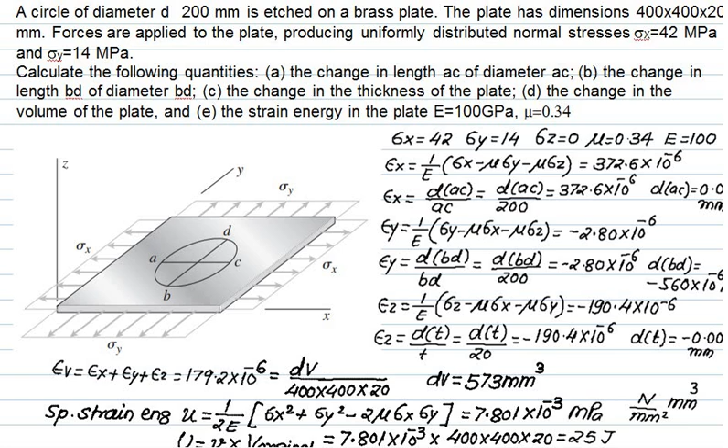Reactions you can find out by using sigma Fx equals to 0, sigma Fy equals to 0, and summation of moment is always equals to 0.

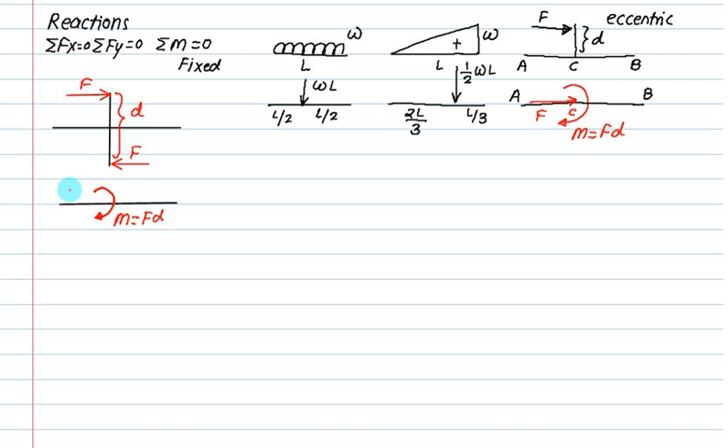Your idea is to convert UDL, eccentric load or triangular load or couple load into equivalent point load and equivalent couple. Aur uske baad phir aap reaction nikaloge aur phir SFD ke liye start karoge. Yahan tak ok.

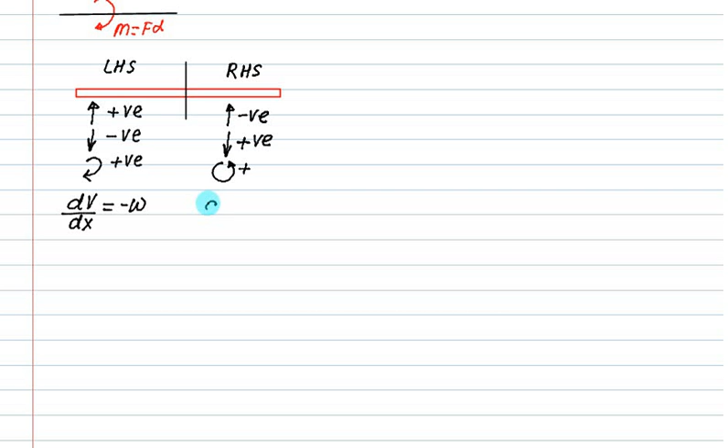उसके बाद हमने ये भी पढ़ा है कि जो हमारा शेयर फोर्स होता है, dV/dx इज इक्वल्स टू -W. करेक्ट। इसका मतलब है कि हम dV को -W इंटू dx लिख सकते हैं। W मतलब तुम्हारा लोड।

अगर हम इसको फिर से जैसे कि इसको XY कोऑर्डिनेट में डाल देते हैं, और ये आपका x है और ये आपका dV है, अगर हम इसको इंटीग्रेट करते हैं dV, तो विल यू गेट इंटीग्रल ऑफ -W टाइम dx।

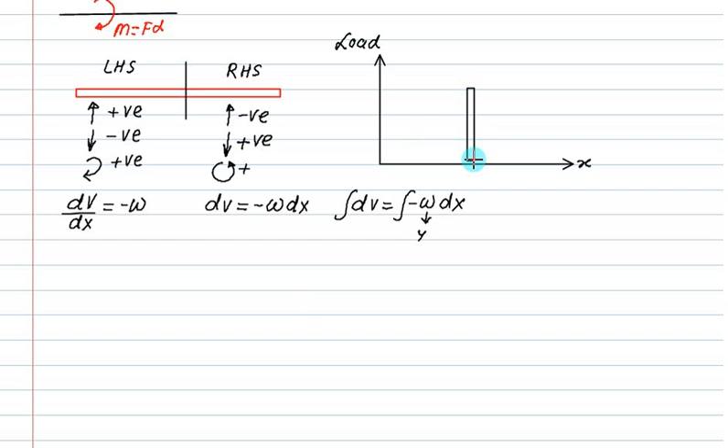करेक्ट। तो इसको हम बोलेंगे y और इसको हम बोल रहे हैं x। मतलब अगर हम यहाँ पर लोड ले रहे हैं, लोड डायग्राम है तुम्हारी, जो आपको डायग्राम देंगे दैट इज कॉल्ड एज लोड डायग्राम। तो क्या ये इंडिकेट कर रहा है dx मतलब एक स्ट्रिप है, इज इट करेक्ट। और क्या W मतलब उसकी हाइट है, तो ये dx है और W इसकी हाइट है। इसका मतलब ये एरिया ऑफ रेक्टेंगल है।

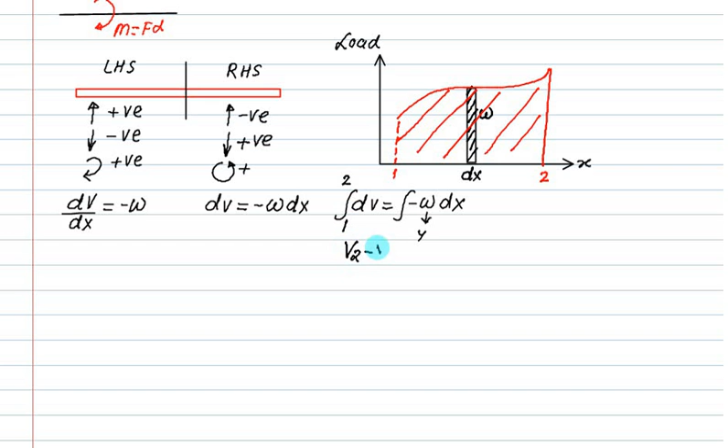अगर आपका लोड चेंज हो रहा है किसी एक पॉइंट से दूसरे पॉइंट की तरफ, ये जनरलाइज कर रहे हैं, तो क्या अगर हम 1 to 2 निकालते हैं तो क्या ये टोटल एरिया मतलब इंटीग्रल W dx हो गया। तो अगर हम इसका इंटीग्रेट करते हैं 1 से 2, तो क्या ये बनेगा V2 माइनस V1। शेयर फोर्स को V से डिनोट करते हैं। सो दिस इक्वल्स टू एरिया अंडर लोड डायग्राम।

That is called as delta V. Remember, it's a change, not absolute value. It will always calculate change.

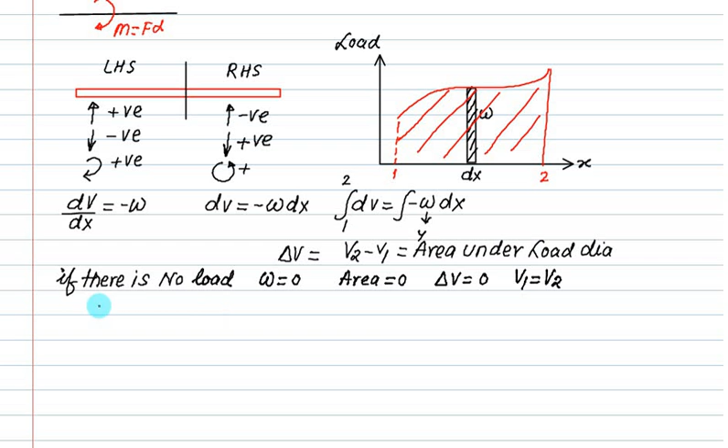If there is no load, then W will be equals to 0. And therefore area will be equals to 0, and if area equal to 0, delta V will be equal to 0. So it means that V1 is equal to V2. So what does it mean? Will the SFD will change or will not change? SFD remains constant.

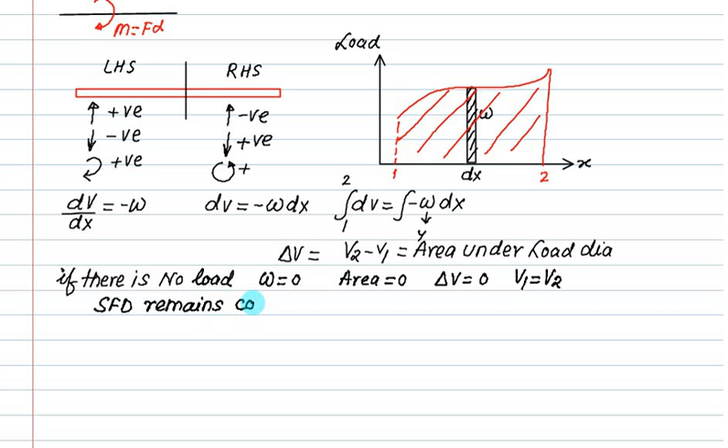For that section, dm by dx is Vx. What is Vx? The shear force at that section. Dm is called as change in bending moment, and dx will be the change in that particular distance. So what is dm? Dm equals to Vx multiplied by dx.

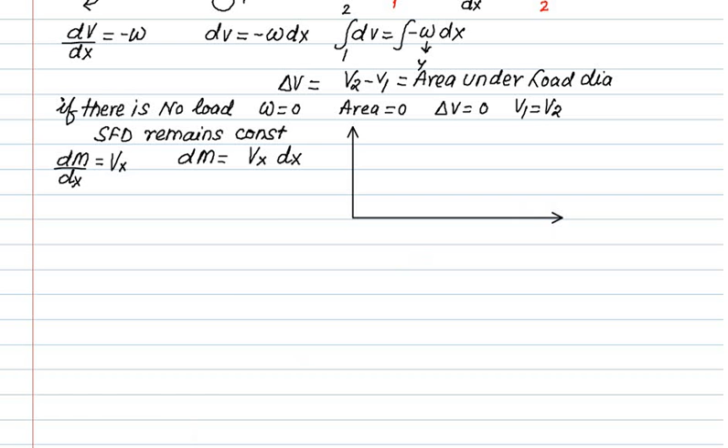इसका फिर से एक मतलब हो गया कि क्या हम इसको ऐसा लिख सकते हैं फिर से, अगर इफ यू कॉन्सेंट्रेट ओनली ऑन द राइट हैंड साइड, इज दिस ग्राफ इज V ग्राफ एंड इज दिस वन इज dx, सो कैन वी कंक्लूड द राइट हैंड साइड इज नथिंग बट अ रेक्टेंगल ऑफ थिकनेस इक्वल्स टू dx एंड हाइट इक्वल्स टू V.

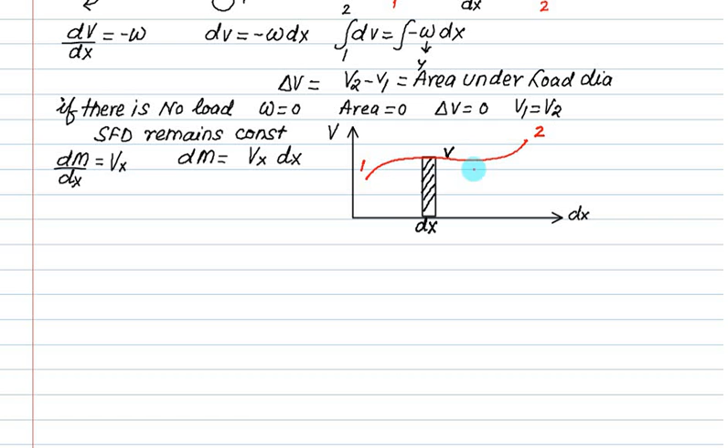नाउ इफ the shear force will change like this from 1 to 2. So is the area under this graph can be obtained by integrating the equation dm from integral vx dx, 1 to 2. So is it equals to m2 minus m1?

Again remember, it's a change in bending moment, not absolute value. Is same as area under which diagram? Is it SFD diagram? Is SFD.

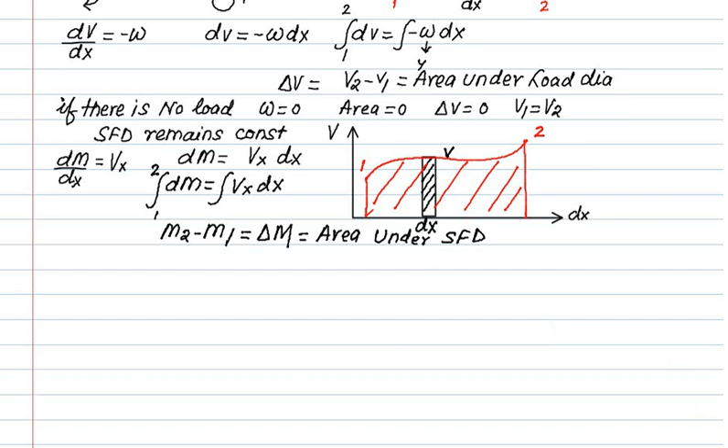The another rule that we have developed is, suppose we have given here one beam, and in this beam there is no load change.

अगर लोड चेंज नहीं होता है तो तुम्हारा एसएफडी चेंज नहीं होगा. इज इट करेक्ट? अगर एसएफडी चेंज नहीं हुआ तो तुम्हारे बीएमडी में कोई फर्क नहीं पड़ेगा. लेकिन अगर यहां पर रेक्टेंगल बनता है, एसएफडी में अगर रेक्टेंगल है तो बीएमडी में क्या बनेगा? 1 डिग्री हरदम बढ़ते रहेगी. सो आपको ट्रायंगल मिलेगा. इज दैट करेक्ट?

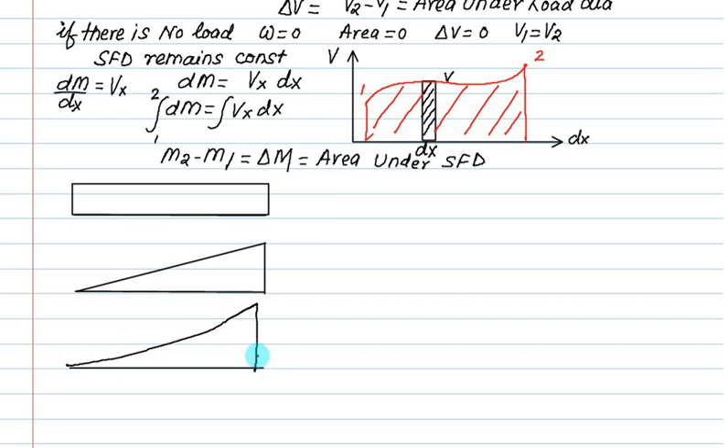ट्रायंगल है तो फिर तुम्हारा बीएमडी क्या बनेगा? पैराबोला बनेगा. इसका क्या मतलब है? अगर हम लोड से एसएफडी की तरफ जा रहे हैं और लोड का डिग्री n है तो एसएफडी का डिग्री कितना रहेगा? 1 से बढ़ जाएगा. और एसएफडी से हम बीएमडी की तरफ जा रहे हैं तो फिर हमारा डिग्री 1 से और बढ़ जाएगा.

कि बढ़ रहा है. सो डिग्री विल इंक्रीज बाय अनदर 1. मतलब ये कितना हो जाएगा? n+2 हो जाएगा. व्हाट इज डिग्री फॉर दिस? 0. व्हाट इज डिग्री फॉर दिस? 1. एंड व्हाट इज डिग्री फॉर दिस? इज 2. व्हाट इज डिग्री? इज y x to the power n.

This equation represents y is equals to 0 or y is equals to constant, that is why degree is n equals to 0. This line equation represents y is equal to x or sometimes multiplied by x, मतलब slope change हो सकता है. This is y is equal to x square or k times of x square.

और अगर SFD तुम्हारा डिग्री 2 में है तो फिर तुम्हारा BMD कितने बनेगा? 3 में बनेगा. और उसी प्रकार जो स्लोप की वैल्यू है वो पॉजिटिव है तो पॉजिटिव रहेगा. अगर रेक्टेंगल ऊपर है तो उसको पॉजिटिव लेना है, नीचे है तो माइनस. अकॉर्डिंग टू दैट यू हैव टू चेंज द स्लोप.

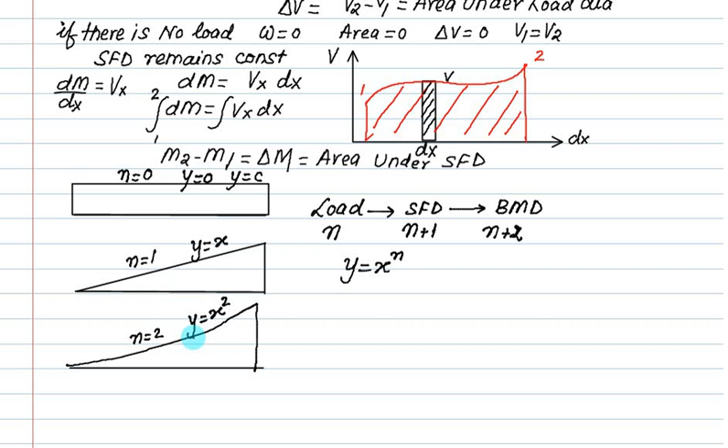द डिस्कशन दैट वी अप्लाइड फॉर लेफ्ट हैंड सेक्शन इज एप्लीकेबल टू द राइट हैंड सेक्शन ऑल्सो.

So one is point load 24 kilonewton, one reaction at point A and one reaction at point B.

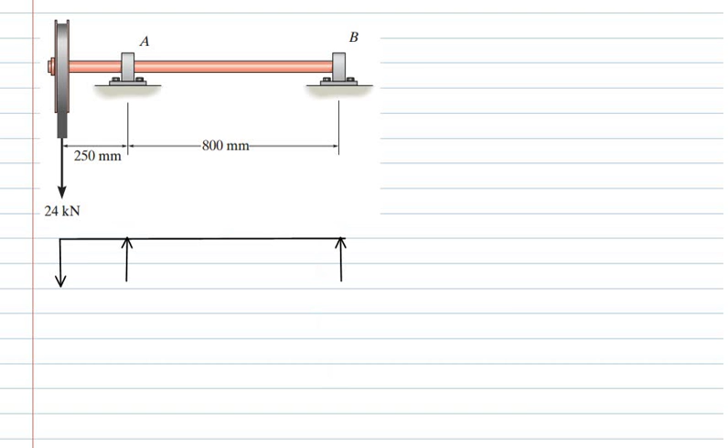If we apply the moment about B, the total moment must equal zero. So 24 kilonewton will make anti-clockwise moment, that is 24 multiplied by total distance, 1050.

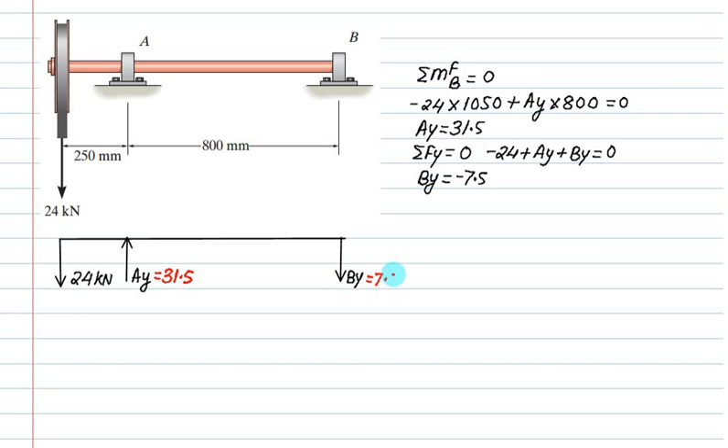Then there is a 31.5, so 31.5. This one is minus 24.

This total is 31.5, so this is 7.5. In between this point to this point, there is no load, so this value remains constant, and finally we close here at 7.5.

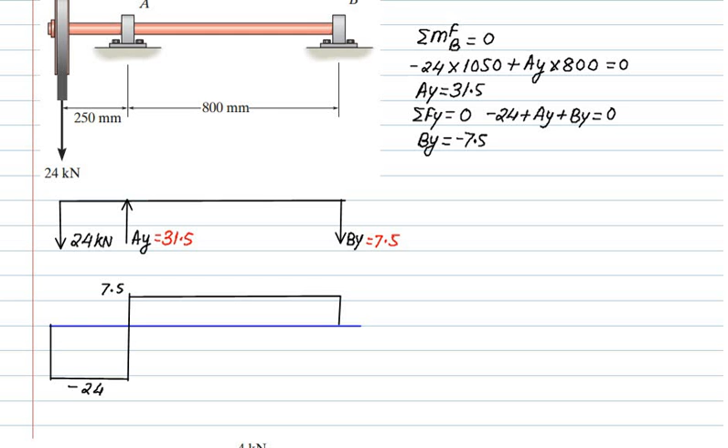You start and end at 0. As far as simply supported beam is concerned, and as far as the overhang beam is concerned, the bending moment at end is always equal to 0. And in the case of cantilever, the bending moment is 0 at free end but is available at fixed end.

So you have to first calculate this area. Area of this figure, a rectangle, is minus 0.25 multiplied by 24, so that is 6. Is this area downward?

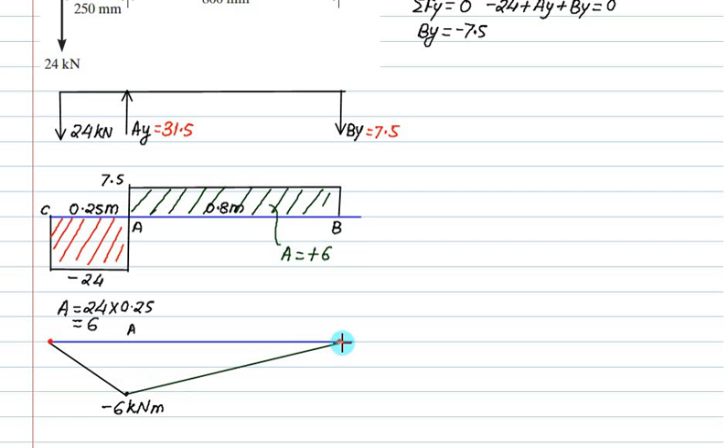If it is rectangle, then it's a triangle. Is it correct? And if this is positive then its slope will also be positive. If this is below then its slope will be negative.

So what is the maximum bending moment for us? This value is called maximum bending moment.

Now after this, the problem is transferred to the bending stress, or from this figure it can be transferred to shear stress.

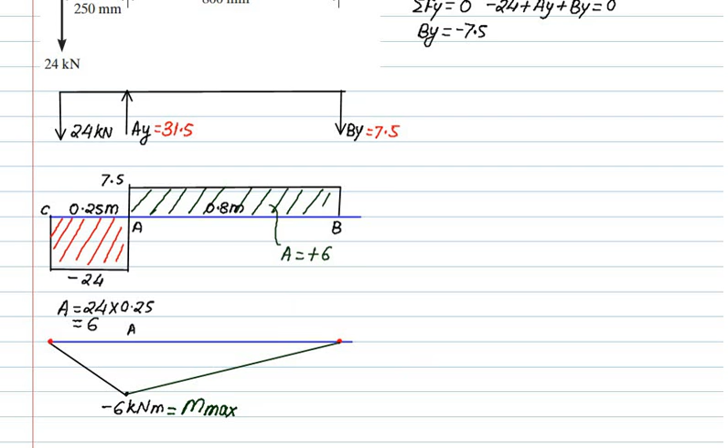So this one is the case of a simply supported beam, and we have two types of load. One is moment is given, one is 4 kilonewton force is given. All distances are given. At B we have roller support, and at point A we have pin support.

So we have two reactions at A and one reaction at B. All of you can calculate its reactions, work that out.

Now to find out the By, you take moment about A.

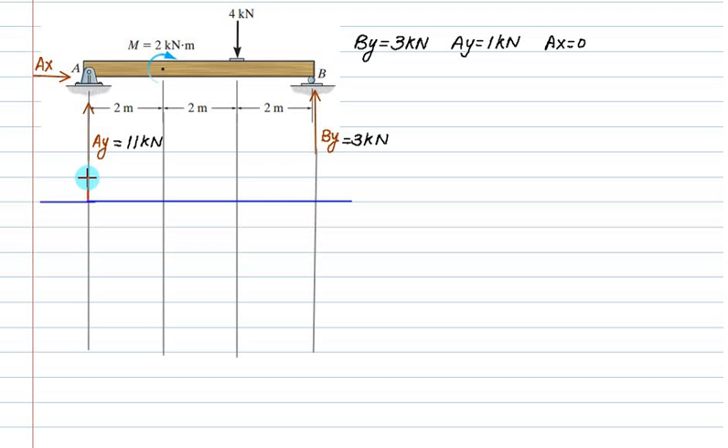1 kilonewton. So we'll go up 1 kilonewton, then remain constant. Moment, there is no role of moment in SFD. Forget about moment, so it will remain constant from this point to this point also. Agree? Moment has no role on SFD.

Then it's a 4, so it will move downward. We already have 1. Now this is 4 downward, it should be equal to minus 3.

And there is no load from the next 2 points, so it remains constant, and finally we close at 0. So this is the SFD.

Now as we all know, the BMD for simply supported at end is always 0. So this is 0, at the end it is always 0.

Now what is this bending moment? What is the size of the rectangle? Is it 2 meter by 1? Is it positive? That means this bending moment will go up to here. No, up to here. Is it correct? We have to take the full area for the bending moment, we'll take the upward force. The bending moment is above here, so we'll take only this much area. So what is this area? 1 into 2, is it 2?

What is the area of this rectangle? 2. Why have we plotted on the upward side? Because our rectangle is on which side? Upward. That means the slope will be positive, we'll check.

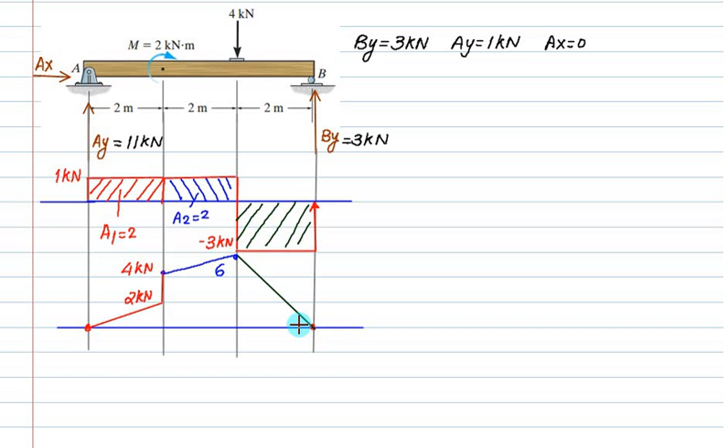Cantilever with a UDL over the entire span plus 1 bending moment. Is it clockwise? Clockwise, no? Okay, 6.

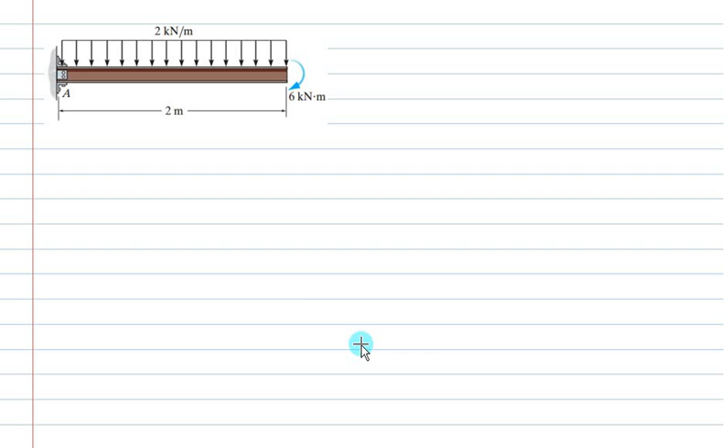So for a fixed end we have 3 reactions. If it is fixed then there will be 3 reactions, one AX, AY and one is bending moment at A. For a cantilever, do not use the bending moment at end point is 0. Total sum is always 0. That is true. So first of all, what is AY?

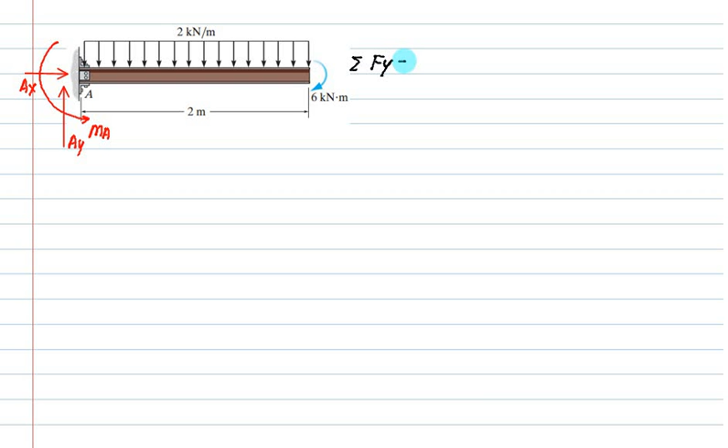So we can calculate AY just by summing Fy. Correct? So sigma Fy equals 0. So here Ay is equal to 4. Agree? Then sigma Fx is 0, so Ax is 0. Remember, total sum is 0. I have not written moment about A.

Now this moment about A, have I taken it clockwise or anti-clockwise? No section yet, nothing about the section right now. Is this anti-clockwise? So this is minus MA. This one is clockwise, so this is plus 6. What is the total load of this one?

Is it 2 into 2, and will it act at distance 1 from this, and this total value must equal 0. So what is the value of MA? This total is 10. So the assumed direction is correct. So now we start with the section idea.

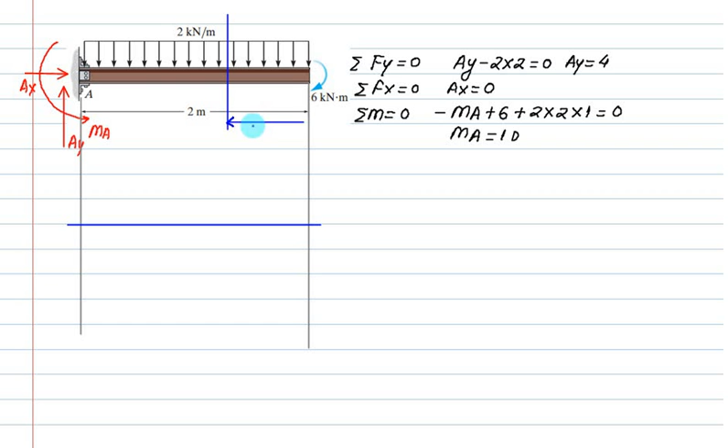So let's say this distance equals x, and let's say this any section MN. So which side are we taking? Right hand side. For the right hand side, downward is positive, correct, and counterclockwise is positive. These are exactly the opposite notation of the left hand side.

Left hand side. Is the force downward, with a value equal to 2 multiplied by x, and is this value positive? And if you put this value, suppose this point is B, so at B your value of x is 0. So what is the shear force at point B? It also equals 0.

At point A, what is the value of x? Is it 2? So this is 2 into 2, that equals 4. Agree? 4, right? So that equals 4. Because you are putting x equal to what? 2.

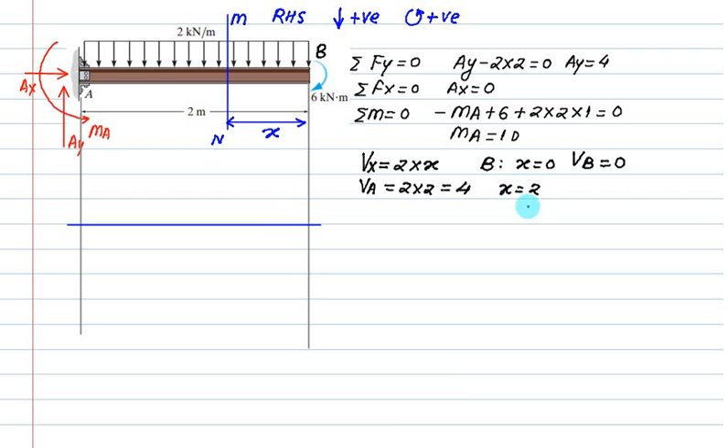What is the bending moment at point B? What is the shear force at point B? 0. What is the shear force at point A? 4. As far as this section is considered, is this 4 on the left hand side? As far as this section is considered, is AY on the left hand side, will it be positive or negative? Negative. So you have to start and you have to end again at the same point.

What is the degree of this curve? Is it 2? Degree is 2 or 1? 1. To observe the free end, is it 6 kilonewton meter? And is it applied at one section only? Is this clockwise? So anti-clockwise is positive, so clockwise will be negative for the right hand side section.

So what will we do, we'll move downward. How much downward? 6. Now this total distance is 2. What is the area of this triangle? Area of this triangle is half base into height.

And this minus 6 and this minus 4, will it become minus 10? So maximum bending moment will come equals to 10.

अच्छा, क्या बनेगा? लाइन बनेगा या फिर पैराबोला बनेगा? It will not rise like this. The parabola will go like this, and then it will fall in this fashion. So actually ये free hand है। Peak उसका यहाँ पे रहेगा। Now what is this value? Minus 4, minus 6, minus 10.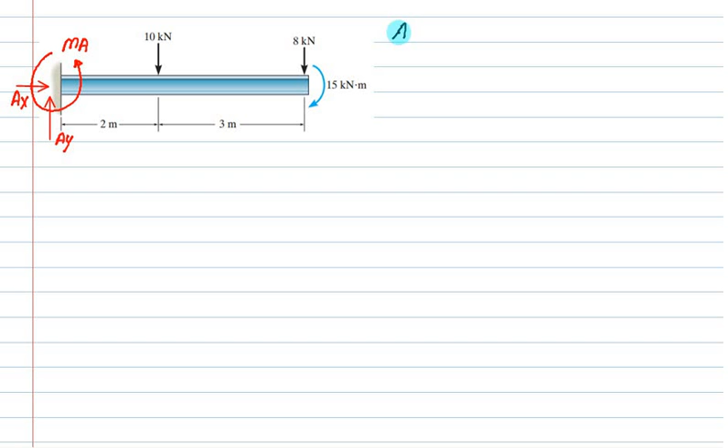In all cantilever problem or SFD problem, normally Ax is always equals to 0. Now use sigma Fy equation and find out reaction. So minus 10 minus 8 plus Ay. So Ay equals to 18.

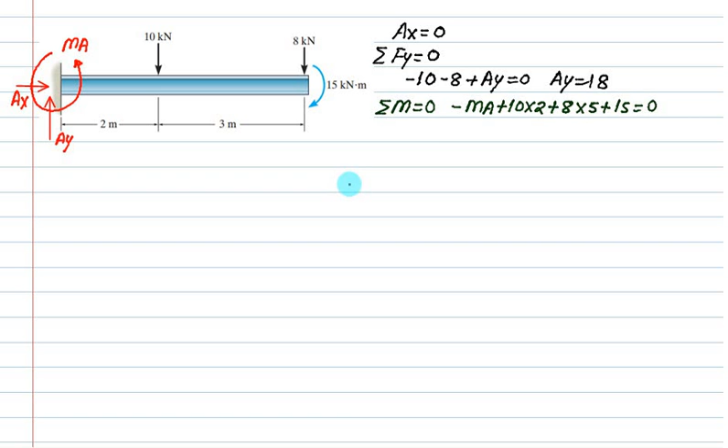So it's a minus MA because anti-clockwise. 10 into 2 is clockwise, 8 into 5 is clockwise, and 15 is clockwise. So your answer is 75 kilonewton meter.

Now let's construct SFD. To construct SFD, we'll consider two sections: one section is AA and one section is BB. The section A is valid from 0 to L, 0 to 3, that is 0 less than x less than 3. And section B is valid from कहाँ से 3 less than x less than equals to 5.

These are two separate calculations. पहले सिर्फ इसके बारे में सोचते, सेक्शन A के बारे में। If we consider the section A only, then this distance is x. Then what is the value of Vx? There is only one force on the right hand side, and is it downward? The downward is positive.

Bending moment has no role on Vx. Now what about Mx? Is this bending moment clockwise? Is this bending moment clockwise? So this is minus 15.

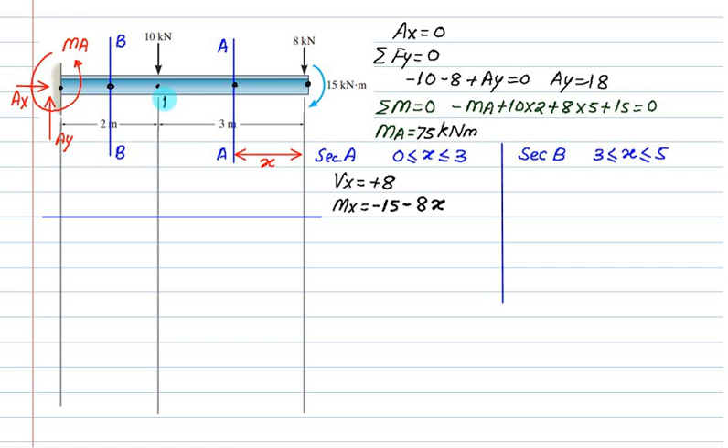यहाँ तक okay? Now if I take this point, some point here, let's take this point equal to D point, and let's take this point equal to E point.

So as far as E is concerned, what is the value of x? Is it 0? At point E, x is equals to 0. So what is the shear force at point E? 8. And what is the bending moment at this point E? Is it minus 15? Agree? So the shear force will be equals to 8 and bending moment equal to minus 15.

So shear force will be here, and bending moment right now is minus 15.

For D, what is the value of x? Is it 3? Yes. For point D, what is the value of x? 3. So what is the VD at this point? It is still plus 8.

What is the bending moment at point D? Is minus 15 minus 8 multiplied by 3. Is it minus 39? Correct, minus 39. Now once we have done this calculation, I think this point is 8.

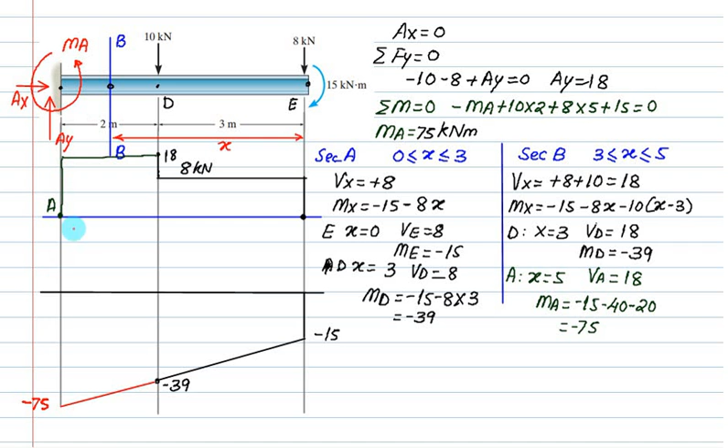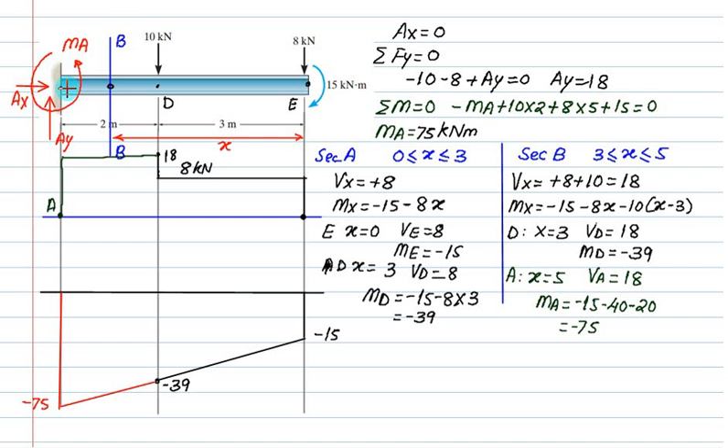Now what is the maximum bending moment? 75, correct? What is the maximum shear force? 18. Maximum shear force 18. Is that correct? This means if we need to fasten a bolt here, what shear force value should we use? 18.

Okay, let's check on the board. We have one reaction of 12, we have second reaction of 36, and we have an 8 kilonewton per meter distributed load.

Now you divide this section into 2 parts. One is AB and one is BC. Now first try for the AB section. What is the limit for AB? 0 less than or equal to x less than or equal to 4.

Consider here one section. Show any section here. Show this distance equals to x. Now compute the value of Vx.

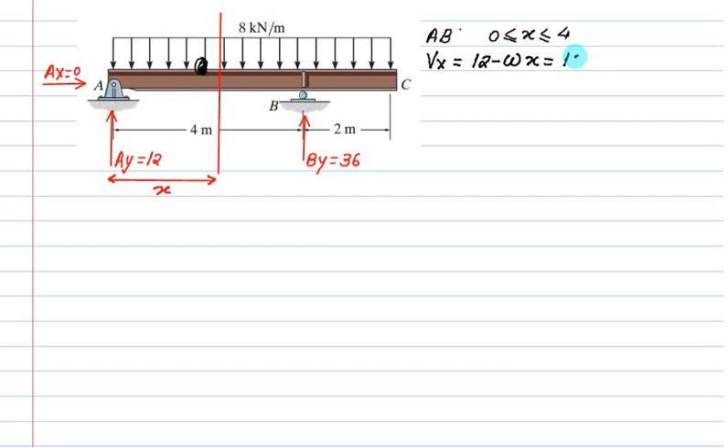Now Vx for this section is 12 upward, which is positive, minus W into x, that is 12 minus 8 multiplied by x. Is this fine?

Now similarly you can calculate Mx equals to, what is the bending moment of 12 about section AA? Is it clockwise? So it's plus 12 multiplied by x. And what is the equivalent point load of this one?

Is it W into x, that is 8 into x, and it will act at a distance of x by 2. So that equals minus, the load is 8 into x and it will act at a distance of x by 2. Does this make sense?

The Vx at point A, you substitute x equals 0. If you substitute x equal to 0, VA equals plus 12. So you start with plus 12. Plus 12, right? So start with plus 12.

Now what about this line? Does this line have a negative slope? Y is equal to mx plus c. Is the coefficient of x minus?

So what is the bending moment at point B? For this you have to put, what is the shear force at point B? So put x equal to 4. What is shear force at B? It is 12 minus 8. What value of x do you need to put? 8 into 4. So 12 minus 32, is it equal to minus 20?

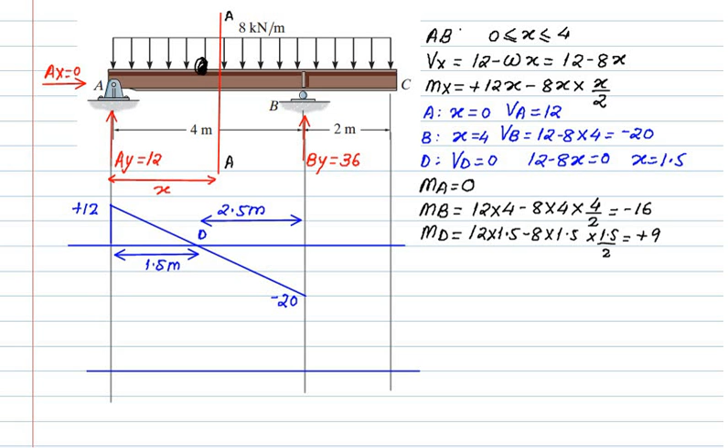Okay, back to this. Now check this. Does this line have a negative slope? This line has a positive slope or negative slope? Negative slope. This means the parabola will be downward. If the parabola is downward, it will start from here. It will attain a value equal to 9, and somewhere here, it will attain a value equal to minus 16. So it will go like this, rise and then fall to here.

Is this fine? Now what is this value? Is it 9? And is this value equal to minus 16? Now do you obtain your one point E where your bending moment is 0? That point is called the point of contraflexure. Now what is special about point E?

That equals 0. So you can obtain this distance, that equals 12 multiplied by x, minus 4x square, equals 0, and you will find x equals 3. So you can find out the distance of the point of contraflexure, and that equals 3 meters from the left end support. This much information you can gather only from the first section AB.

Now if I show you this section, shall I go for the right side or shall I go for the left side? If I go to the left side, I have to do a lot of calculation. If I go to the right side, I have to do very small calculation. Is that correct? So I will solve BC by the right hand side section.